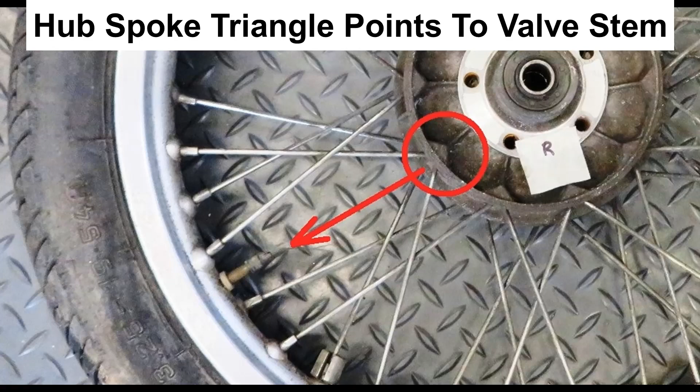Before removing the spokes, document the spoke pattern. The triangle of the hub points to the valve stem hole. The first inner spoke is 3 nipples clockwise from the valve stem, and the second is 4 nipples from it, and so on. The first outer spoke is 4 nipples counterclockwise from the valve stem, and the others are 4 spoke nipples away from each other.

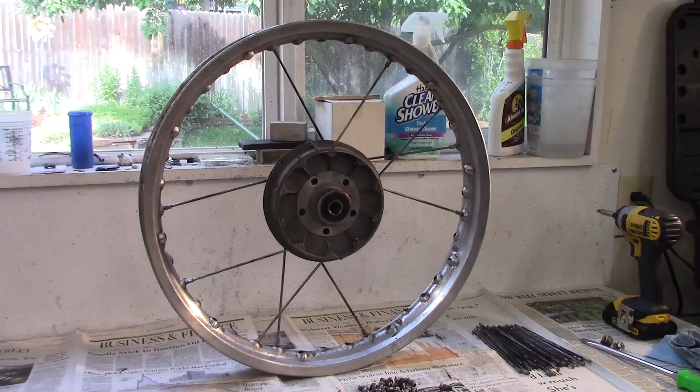So I'm removing the spokes from the wheel because I'm going to have the hub vapor blasted, and then I'm going to try to clean up the rims. I'm going to inspect the spokes to see if they're salvageable, and the nipples. Now I got a spoke wrench from Boxer 2 Valve, and spoke nipples come in various sizes from 5.6 to 6.8 millimeters, so they're fractional sizes.

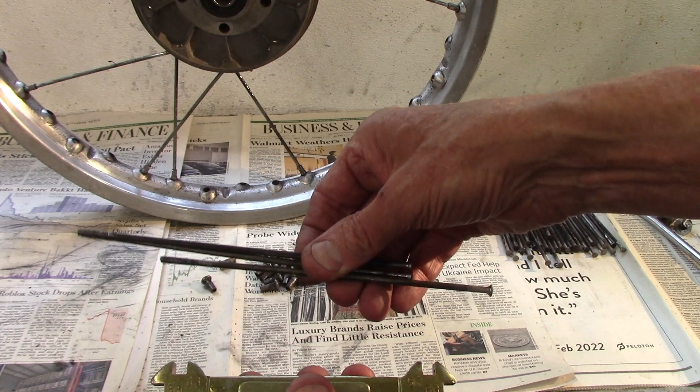And on this bike, these are the nipples. The 5.6 seems to be just about right. And these are the spokes, which in the day and age that they were made were chrome plated, and I'm going to clean them up just to see if they're salvageable. And if not, I'm going to go ahead and replace them with stainless steel spokes and nipples.

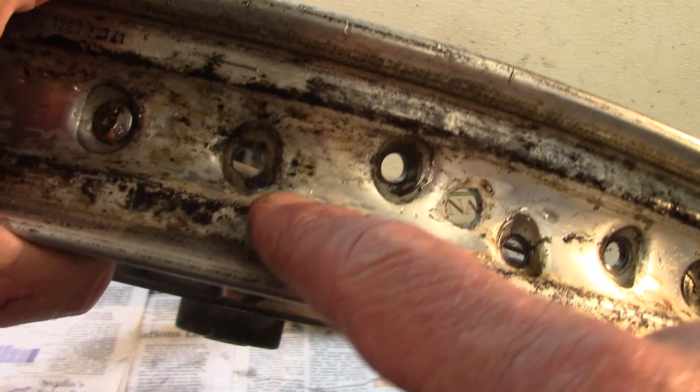I use Kroil, and I put a little on the threads on the spoke, and then I also put a little on the nipple. See if I can find one here to show you. I put a little here on the well around the nipple so it could get into the thread at the top, and I let that sit for about an hour.

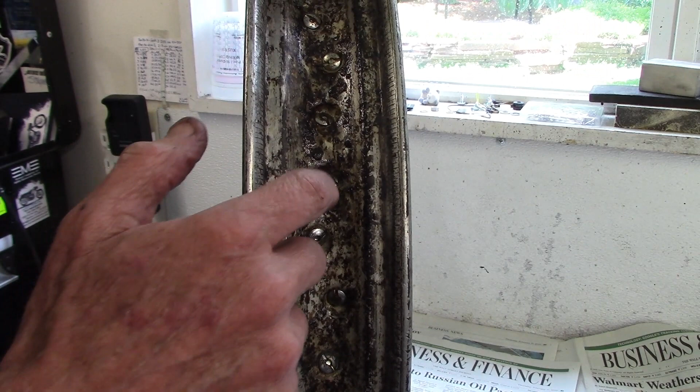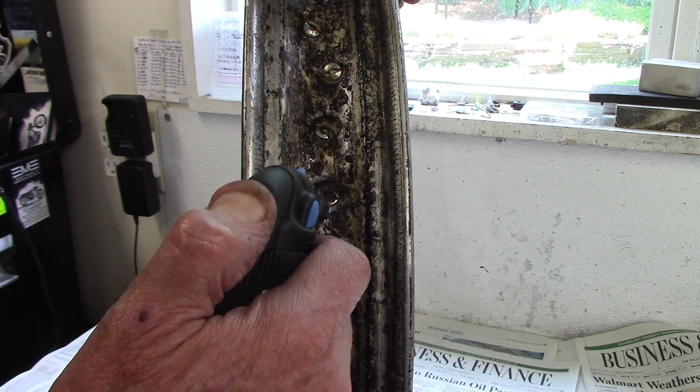Now when I run into a really stuck nipple, I'd use my little propane torch to heat it up and try to loosen up the nipple on the spoke. So I get it warmed up, and then I put a little Kroil on it, which will get pulled in, and then it gets loose enough on the threads that I can take it off with the spoke wrench and not round off the nipple.

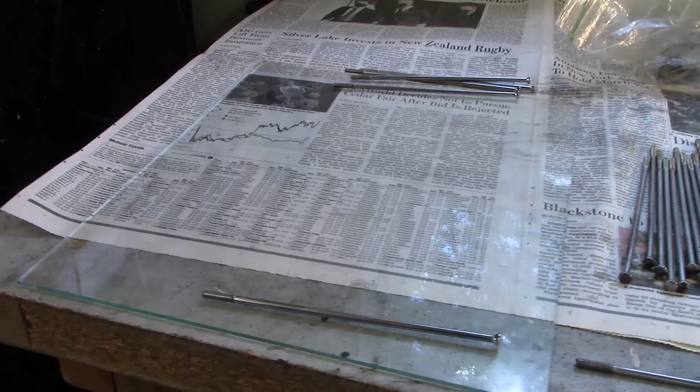Well, I have the hub removed from the rim, and this is the pile of spokes and nipples from the front wheel. When I removed the spokes, some of them were visibly bent, so I pulled them out. And after I cleaned them, I thought I'd use a glass plate and just see if any of the others showed too much of a bend. So what I do is just lay it on the plate, give it a little push, and kind of watch as it goes.

Now that one's okay. This one, when I laid it on the plate and give it a little push, it just doesn't want to roll because it's got a bend in it. And if I get it to roll, you can see and hear that one's kind of bent, so I'm not going to use that one.

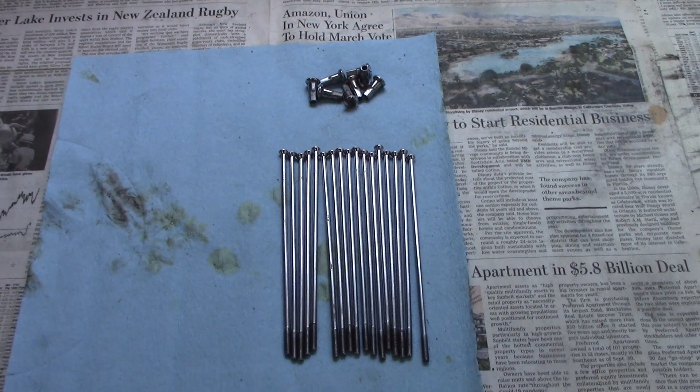So these are the rear wheel spokes and nipples that are still good after I inspected them. Now there's 40 spokes and nipples on the rear wheel. I ended up with about 17 usable spokes and maybe about 7 or 8 usable spoke nipples. So I've changed my mind. I'm going to go ahead and replace the spokes and nipples, and go for stainless steel spokes.

Now this is the rear wheel on the R80ST, and according to Bob Fleischer, aka Snowbum, there's an offset from the edge of the rim to the edge of the brake housing here, or I should say the brake side of the hub, and it's 3 millimeters. So this rim is 3 millimeters away from this edge, and that's done so the rear tire won't rub.

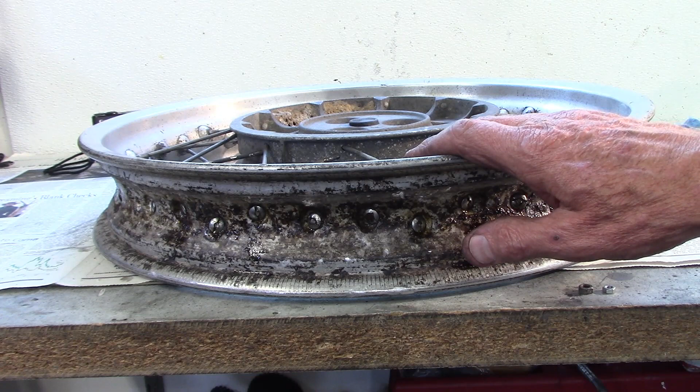So I laid the rear wheel down on my workbench on the brake drum side, and there is a gap. Now I have, I think, an M3 nut, and it measures right at about 3 millimeters, just a little shy. And then I have an M4 nut, and its thickness is closer, it's between 3.5 and 4.

Now if I slide the little M3 nut, it goes under the rim, but the M4 won't. So that confirms that the offset on this rear wheel is very close to the 3 millimeters that Bob mentioned.

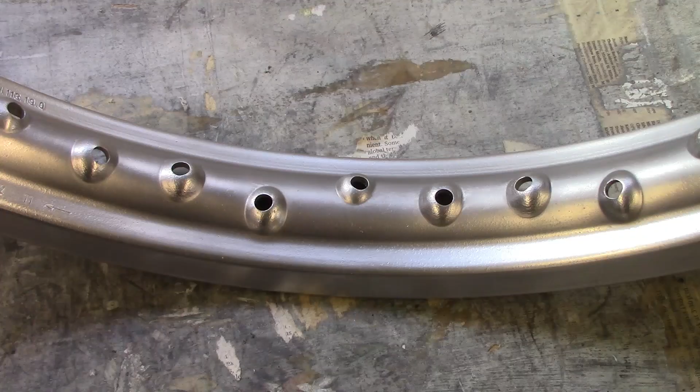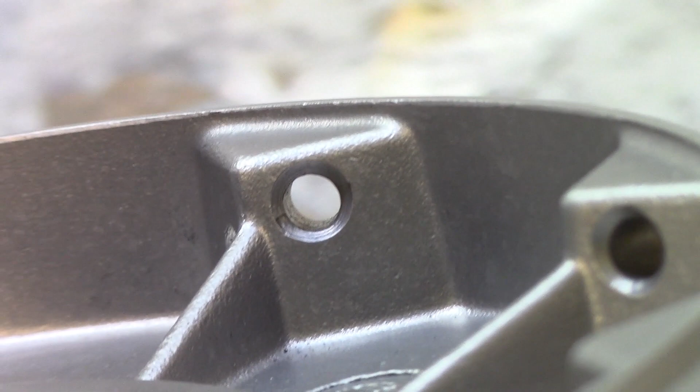In preparation for lacing the wheel, I inspect every one of the spoke holes in the rim to see if there's any cracks. I looked at all of them and I didn't see any. I also inspected the holes here in the hub that the spokes go through. There's some burrs, but no cracks on this side. And on the inside of the hub, I didn't find any cracks either, so that's all good news.

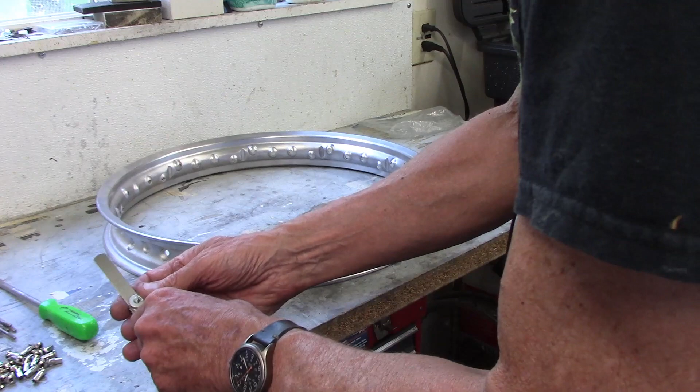Now I want to check that the rim is flat and not badly bent. And I'm using a 0.5 millimeter feeler, and I went all the way around and it would not go under. And I also checked on the inside and it would not go under. So I've got a nice flat rim.

Now the wheel takes 40 spokes, and these are stainless steel. Now the other thing I want to do, because it's a lot easier than using a spoke wrench, is be able to use a screwdriver in the nipple to tighten it up. But because the spoke can extend outward, I also ground a little groove into the blade of my screwdriver, so there's some clearance if the spoke pokes through. And I used a Dremel tool with a milling attachment to make that little slot.

Now on the front rim, you can see the arrow which shows the direction that the wheel is going to rotate. And that arrow is on the right side of the rim. So when I put the rim down on the workbench with the hub, I make sure that the arrow side of the rim is down on the workbench and the left side of the hub is facing me.

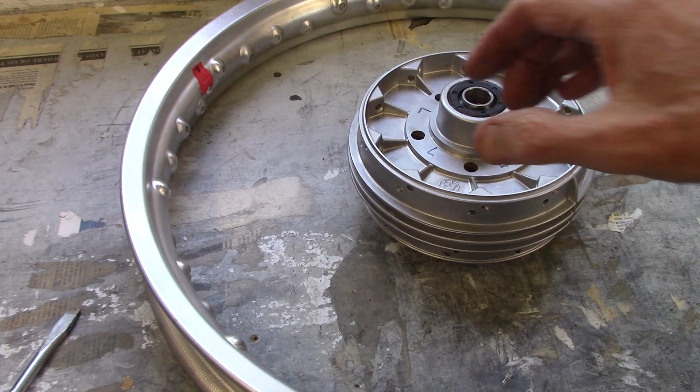So I've laid down the front wheel hub, and this is that little triangle here which points at the valve stem hole. Now the holes here and here and here all the way around I marked with an L. Those are inside spoke nipple holes on the rim, and on the other side are spokes that are going to go to outside nipples on the rim. So I'll be able to use that to get started, and then I'll just repeat the pattern.

Now there's a detail in the design of the spoke head, and near that black dot is a little ridge in the head of the spoke, and that's used to stabilize it in the hub, and I'll show how that's done later.

So I'm ready to start lacing. I have my little triangular piece here on the hub right across from where the valve stem hole is. This is the inside hole, so I'm going to run a spoke in, and it's going to go to the 1, 2, 3rd hole. So I put my spoke nipple in, and I'm just going to tighten it gently, about a roll like that, just to get it in.

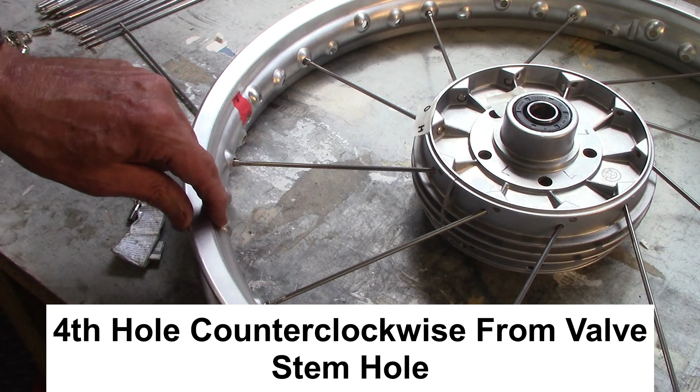Now the first outside spoke is going to go 1, 2, 3, 4 nipple holes from the valve stem hole. So I'll slide that in the hub, and then put the spoke nipple in, and like I did before, just give it about a half turn to catch.

Now the next one will come in this way, like this, and it should be 4 holes from here. 1, 2, 3, 4, and a spoke nipple goes in like that, and I had a little bit of a turn. And so I'll just continue doing that until I get all the outer spokes installed.

Okay, I've got the left side outside spokes installed. So you see they cross over once, goes all the way around, so I now can flip the hub and rim over and work on the same approach to install all the spokes on the right side of the wheel.

So the layout on the right side is the same pattern, and I put my little marker here inside outside. So the spoke goes in here, and it's going to be 1, 2, 3 holes over, and do the next inside hole, and that should be from here 1, 2, 3, 4. Okay, I have all the right side inside spokes installed.

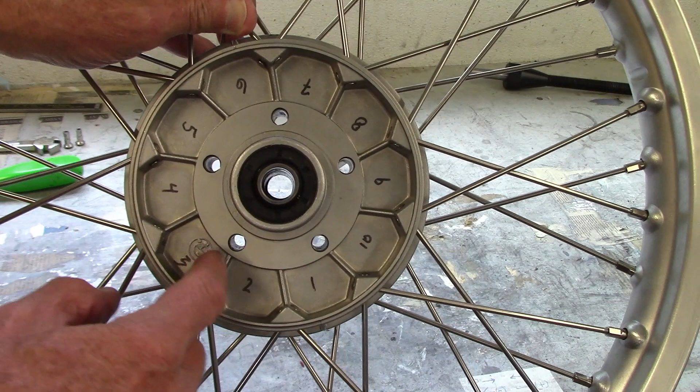So now that I have the spokes installed, I'm ready to start truing the rim. And one thing I did was mark the inside of the hub, each of the sections with a number. There's 10 sections, and that's helping me with measurements when I take them, so I know where they came from. And the other thing that I've done to the rim, which I showed earlier, is there's a little red tape by the valve stem hole, and I always start adjusting from that area.

So I want to talk about some of the details of the layout of the spokes. You'll notice that there are 4 spokes in a group, and then another 4 spokes in a group. Now the 2 outside spokes go to the outside of the rim, and the 2 inner spokes go toward the center of the rim. So that means that if you want to get the radial distance adjusted, which is centering the rim on the hub in this direction, if you tighten or loosen the 2 inner spokes, that's going to have more effect on the radial movement.

And if you were trying to get lateral truing, which is in this case up and down, because I've got the wheel lying down on the workbench, then the 2 outer spokes are going to have more influence on that. Now that said, all 4 spokes do affect both radial and lateral, but again, the major influences, as I mentioned, are the 2 inners give you radial adjustment much quicker, and the 2 outers give you lateral much quicker.

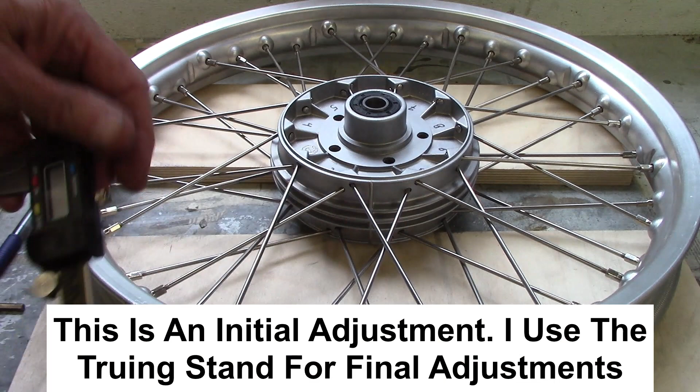Now, before I put the wheel in the truing stand, I'm going to try to get the radial adjustment made here on the workbench. So I'm going to start getting the rim centered on the hub, and I'm going to use an 8-inch vernier caliper and make measurements between the inside of the hub and the outside of the rim in each of the 10 sections until I get it pretty close. Then I record my measurements on this little diagram. These are the little triangular blocks that the spokes go into in the hub, and these are the numbered sections. So I'll record my measurements all the way around.

Now, before I start tightening any spokes, everything's loose now, I just kind of want to get the hub and the rim close to center, and then I can start tightening spokes. So I'm going to use my vernier caliper and zero it. Section 1 is directly across from 6, and 9 is directly across from 4. So just going to kind of see where I am. Now what I do is try to get it level up and down, and then I wiggle it just a little bit until it's tight. I find the tight spot.

And it's about 179.9 for section 1. And for section 6, it's about 179.3. So they're pretty close. And I'll do the same with these two. And if I find there's more than about 2 or 3 tenths of a millimeter, I'll push the hub a little until I get them pretty close, and then I'll go around and start finger tightening spokes.

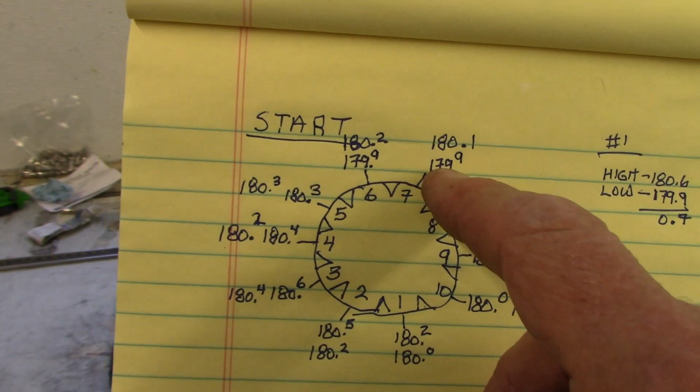So what I'm going to do is loosen the center spokes on this side and tighten the center spokes on this side just by finger. And it should help move this over a little bit and shorten it up on this side and lengthen it up on that side. So after loosening these and tightening these by my fingers, I made some adjustments, as you can see by the numbers.

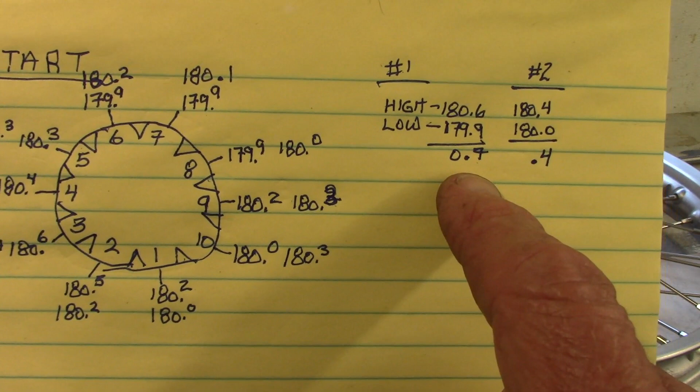Now over here, I summarized the highest and lowest and the difference. So I started with about 0.7 millimeters of radial play, which is way too big. The maximum is 0.5. And then here, after I did the little adjustment with just changes in finger tightening, I got down to about 0.4. And I may make one more set of adjustments.

So these are the numbers after going around one more time. And I did need to use my screwdriver to tighten up a little bit. And what we've got now is down to about 0.3 millimeters in the radial direction for variability. So that's pretty good before I put it into the truing stand.

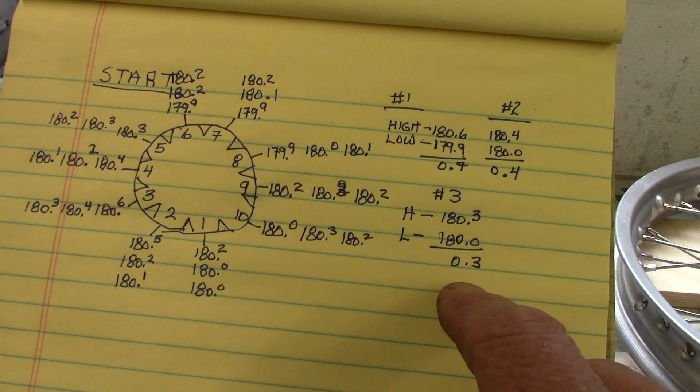One thing that's interesting is this section 3 is always fairly big relative to the ones on either side. And it's possible, in fact, that there's a bit of a deformation in the rim right there. Sometimes people have hit curbs or bounced against something and deformed the rim. So that one may be a little bit of an indicator of some minor bending. Because if you don't have that, then it's down around 0.2-ish, which is a really good alignment.

Now before I put it in the truing stand, I'm going to finger tighten the outside spokes all the way around, and I'll probably just check to be sure I didn't distort anything in the radial dimension when I did that. But that should be enough to hold the rim in the lateral dimension.

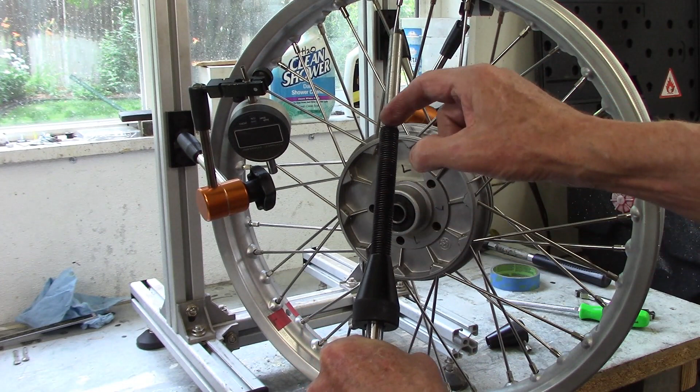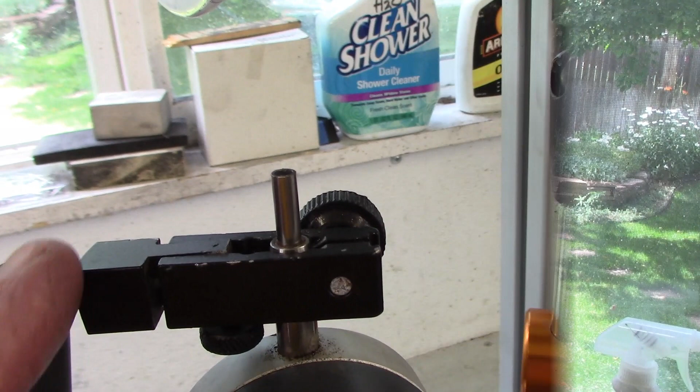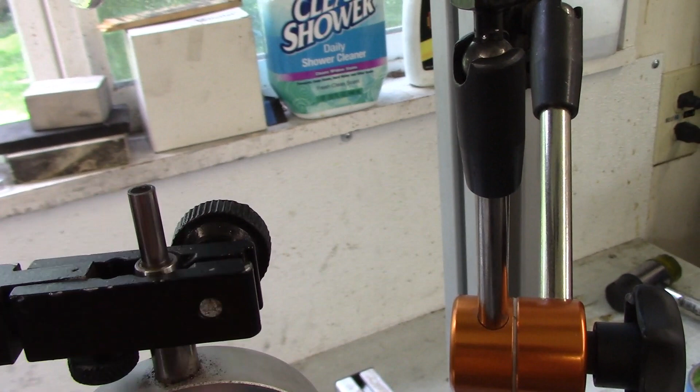Now the cones on the spindle have a set screw which I tighten, and I put the spindle in the top of the stand, and it's also got a set screw which I tighten, because you don't want the wheel moving in any dimension while you're trying to get everything trued. Now the stem of the dial gauge had a small feeler in it with a little ball bearing, but it's too small a contact area, so I took it out so I get a flat area here to engage the rim with.

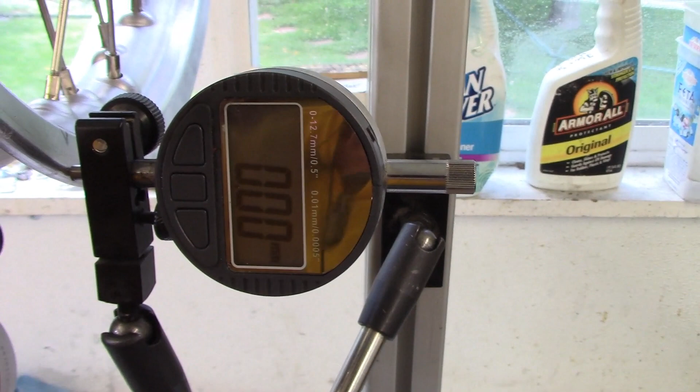Now this dial indicator I've set on the edge of the rim, so it's going to measure radial deflection, and then this one I've set on the edge of the rim, so it's going to measure lateral deflection. So then I zero both of the dial indicators right at the valve stem hole.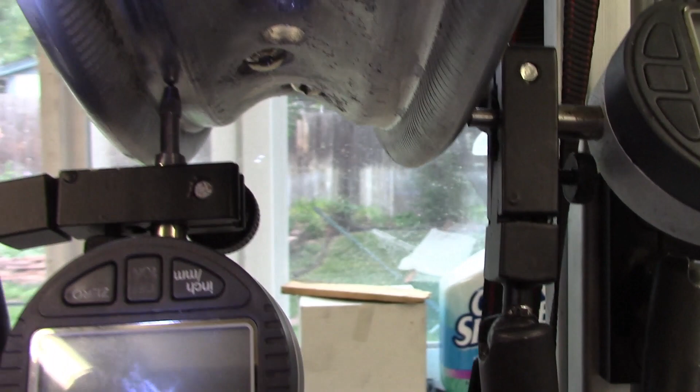So I originally started measuring the radial distance changes on the outside of the rim, but it was pretty banged up. So what I finally did is I put the little ball bearing tip back in on that particular micrometer, and there's a reasonably flat section on the rim on the inside. Now there's some pits in there, but I found this was more reliable on this wheel for getting the radial measurement.

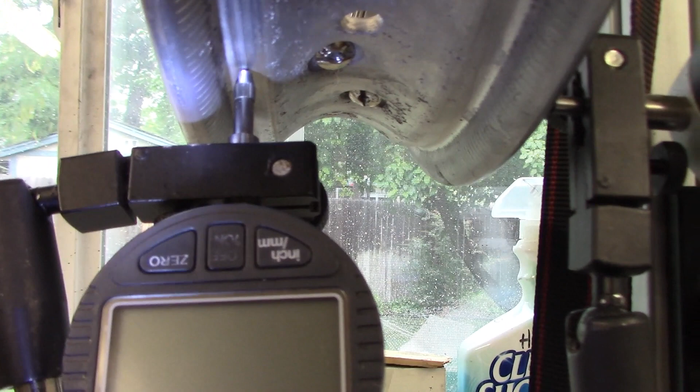So what I'm going to do is start adjusting the outside spokes and attempt to get the lateral changes to no more than 0.2 millimeters. To help me keep straight what I'm doing, I made a little piece of tape here, and it shows that when I get a negative reading on the dial indicator, it means the wheel has moved too far to the left, and so what I need to do is adjust it to the right.

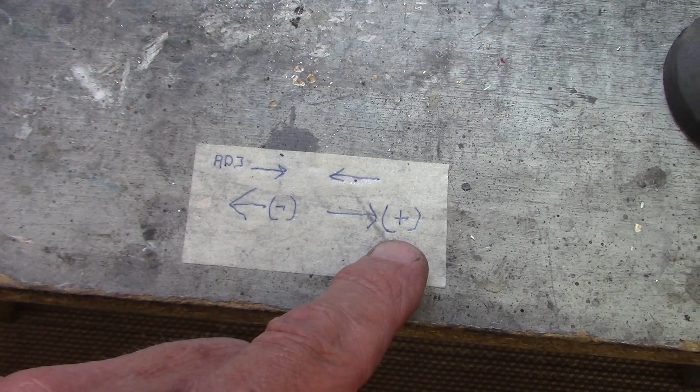And similarly, if I get a plus movement on the dial indicator, that means the wheel's moved more to the right, so I need to adjust it to the left. Having that to look at makes it a lot simpler to keep doing things correctly.

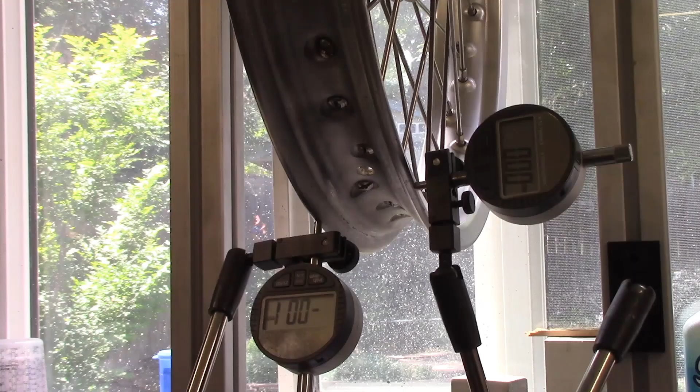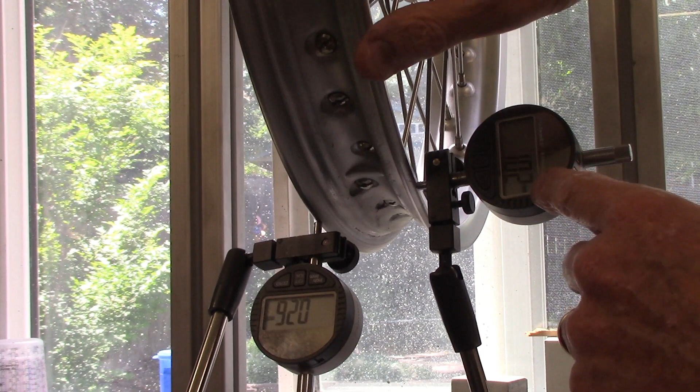So I'm just going to spin the wheel and take a look at what's going on. This is the lateral, and this is the radial, and I'm going to zero them and just spin. And here it's going down to minus 0.05. Now it's going to plus, and it's up to like 0.1 millimeter, 0.15. And then it starts to go back down again.

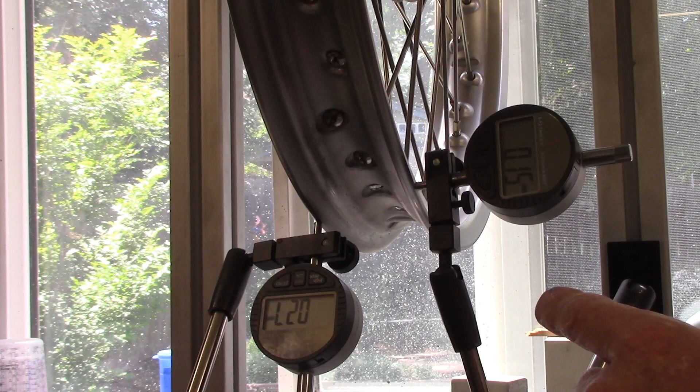So I'm going to work on the lateral adjustment next. The little V mark just tells me I'm at the valve stem, and as I rotated, I put a negative here and a little mark. What I'm looking for is to get the lateral movement no more than plus or minus 0.1 millimeters, because the total deviation can be no greater than 0.2.

And this indicates that I'm beginning to get past minus 10. And I keep rolling, and then right here, it switched over to about plus 10. And now I keep going. Now that's a pretty long section of plus 10, and it ends right about here. Now, if it's plus, that means that the rim is pushed over to the right, and if it's minus, it means it's pushed over to the left.

So what I'm going to start with is adjusting the big long run of plus and try to get rid of it. Now, in each group of 4 spokes, the outside spokes cause the biggest change in lateral movement. And this one, which is over on the left side, if I tighten it, it's going to pull the rim that way. So I'll start tightening these in each group of 4, and as necessary loosen these and try to pull this whole section of rim over to the left.

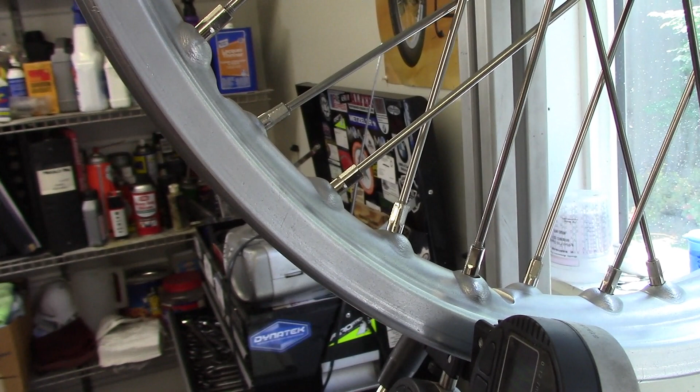And I'll do that in small increments, because even as I work in one section of 4 spokes and make a change, it will cause some deviation in the adjacent section as well. So you don't want to try to make the correction all in one change. You want to do it incrementally in small amounts of rotation of the spoke nipple, and then see what the difference overall is. And that way you can get closer to what you want to achieve and not overshoot.

So I'm going to use my spoke wrench to tighten and loosen. And one of the things that you should keep in mind is that when you turn to the right, you get tight, and when you turn to the left, you get loose. So if you take your right hand and you curve your index finger, that means in this rotation is tight. And if you use your left hand and curve this way, that's loose. So right, tight, left, loose. Remind yourself of that, because sometimes you get yourself confused.

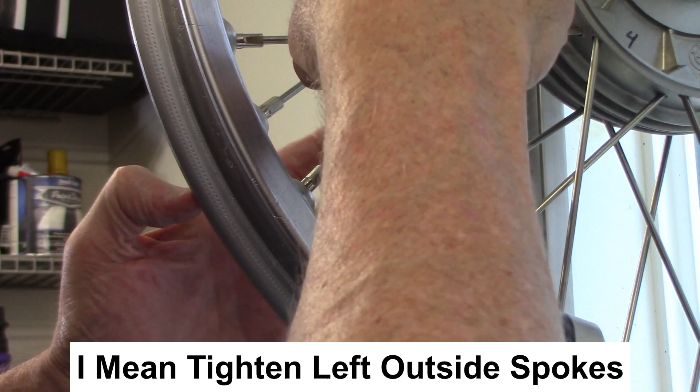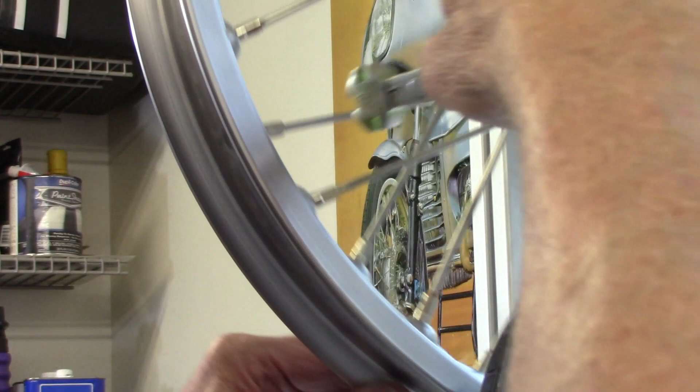So I'm going to start out by just tightening the spokes about a half turn, and I need to tighten the left outside. So right is tight, so I just go around like that and take every one of them about the same amount, so I'm not getting too tight all of a sudden. And I just keep going around, and then I'll take a look at my dial indicator and see how much difference I've made. So the dial indicator is back to where it was before, and you can see I'm actually minus a 100th of a millimeter.

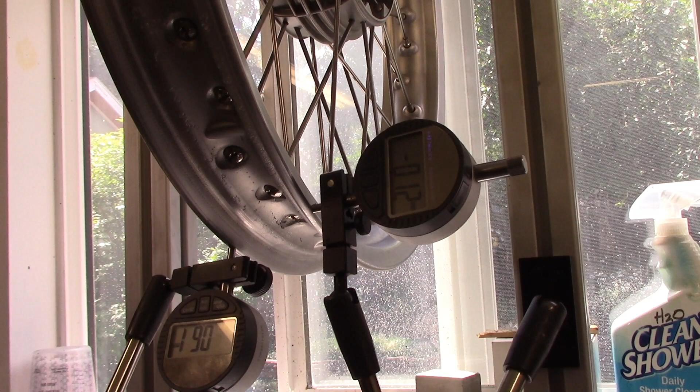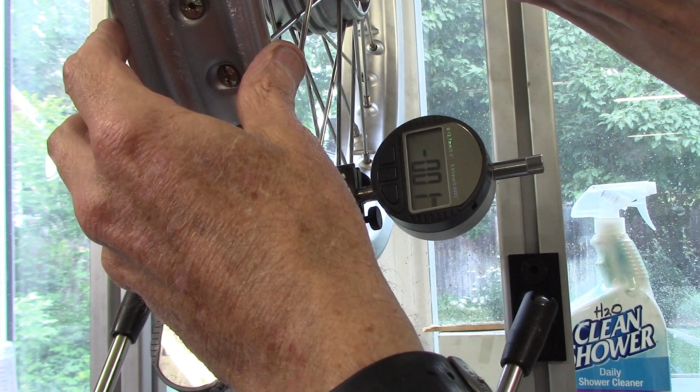So I made some adjustment, and I'm just going to spin it and see where I am. Still a little big in some places, but interestingly it goes negative much sooner than it did before. So actually I've overcorrected a little bit already, which I'll go back and fix. Now as I work my way along the rim, you can see here I'm going up to minus 14 and then back down again. So I need to adjust this section a little bit. So I'm going to start by loosening the spoke on the left a little bit. And you can see that the deviations come down.

Now I'll back up again here. So I'm going to loosen this one just a little bit. And I'm going to tighten the right side, which is actually quite loose. So you can see it went from minus to plus, just because that spoke was loose. Now we're still a little bit big here, so I'm going to back off that one a bit and tighten the right one a bit. And that's too much. So I'll back that off a little, down around 0.06.

And we go back to a little bit too much negative in here. So I'm going to tighten one of the inner spokes just a little bit. And that gets rid of it, and loosen one of the inner spokes just a little bit. So I did most of it with the outer.

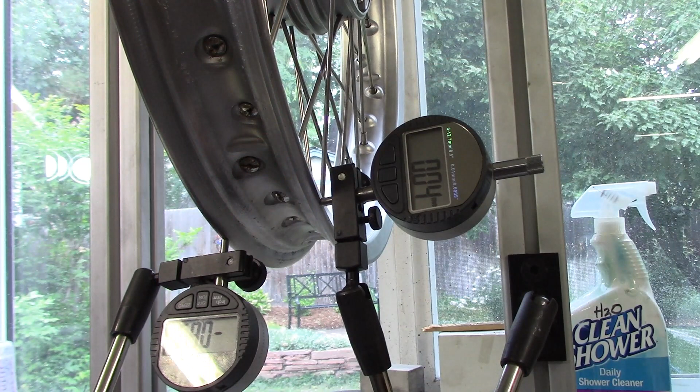And again, you see here, it's a little bit too much. So I can loosen this guy a little. And he comes down to about 11. And I'm going to tighten the inner one a little bit, because I need to reduce how much it is on plus. And that smoothed things out pretty nice.

So just to review again, if it was too negative, loosen this, tighten this. These are the outsides, because that gets you the biggest adjustment. And then if you need a little addition, use the insides. This one's the left inside, this one's the right. So if I loosen this left inside, the wheel's going to come over to the right. And if I tighten the right outside, the wheel is going to come over to the right.

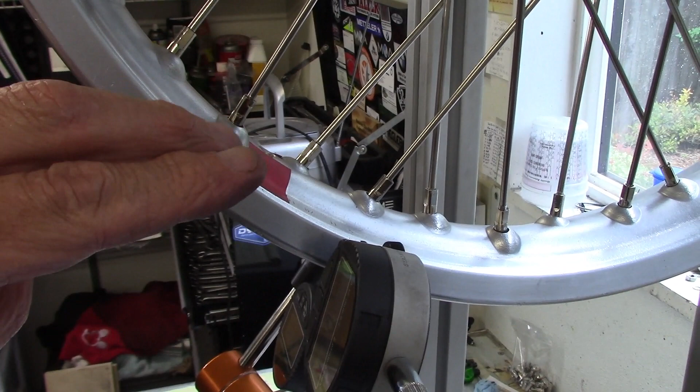So I make most of the adjustment with the outsides, and if I need a little additional, I'll try to tighten and loosen on the insides appropriately to get things smoothed out. And as I do that, as you noticed, it'll ripple a little bit to the adjacent section of 4. So you want to roll your wheel back across the section you worked on, the one before it, and the one after it. And if there was a little bit of variation, too much change, play with these guys to smooth it out a little bit.

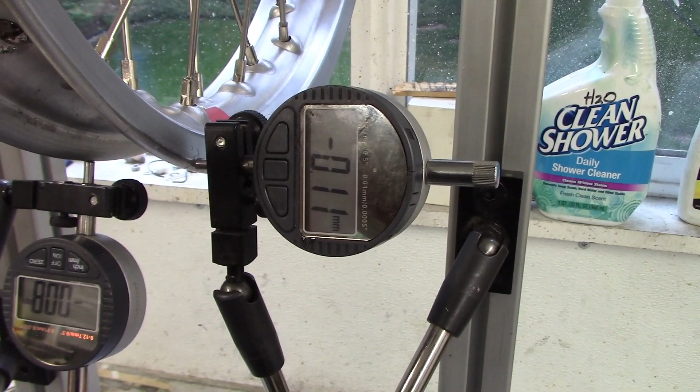And just kind of work through each of those sections of 4. So what I find I'm doing is I tend to be working on smoothing things out across 3 sections of 4 spokes. And that seems to work pretty well for getting the fine adjustments done. So starting at the valve stem but rolling the other way, you'll notice that the negative is still okay. It doesn't get any bigger than 0.1 millimeter.

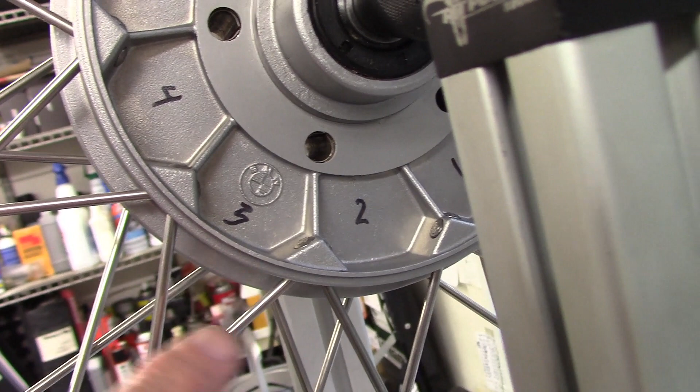And then right in here, I get a little further, it comes back down, and then right in here, it just takes off. It goes up to minus 0.21 and then right back down again. Now I marked that section, and it's very short little piece, about like that. And when I look up here, it's right in the area of section 3, which is that section that I noticed when I was trying to set the radial deviation and get it true. There was an anomaly right in that area. It jumped up radially, and I'm seeing it jump up laterally.

So I suspect that this is where there's been a bit of a bend to the rim from having hit something. So one of the things that I do is I usually just ignore this section, because there really isn't anything I can do to get rid of the larger deviation inside it, and just work on smoothing out everything on either side of that. So I've adjusted the lateral movement, and things are looking pretty good. It bumps up to 10 and 11 in some places, but generally it's within tolerance.

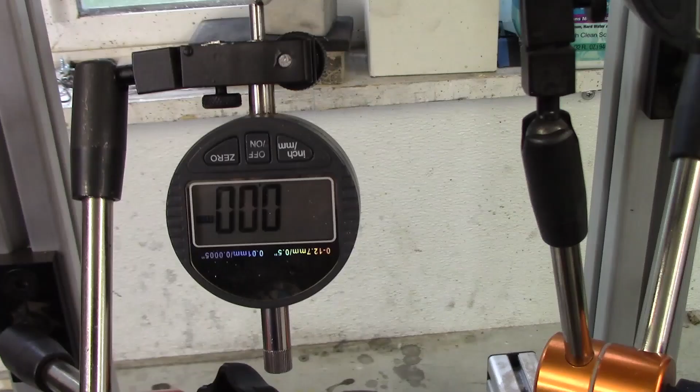So this is the radial indicator, and you can see the differences, minuses, and some pluses. It transitions from pluses to minus. So I went back and noted where the minus transitions to plus on the radial measurements and marked it on the rim. And then here it goes from plus back to minus, and then it transitions again back to plus. So after looking at the rim, this is a negative, and across from it is a negative, and this is a positive, and across from it is a positive.

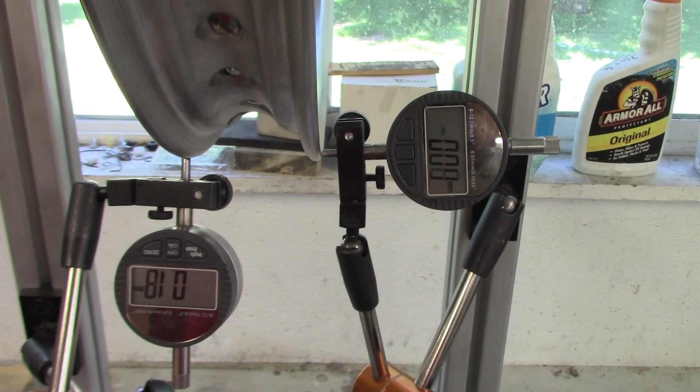So what's happened is this section and this section have been pulled in, and I think that's caused these two sections to bulge out. So the way to proceed is to loosen these, and then tighten these and tighten these to get rid of that bulge. So after those adjustments, here's where I am now. And the radial is bouncing between minus 0.25 and plus 0.25, which is pretty good.

And the lateral has gone out more than I'd like in certain sections. So I'm going to have to come in and make some finer adjustments to get the lateral back where it needs to be. But I'm making progress. Patience is a virtue.

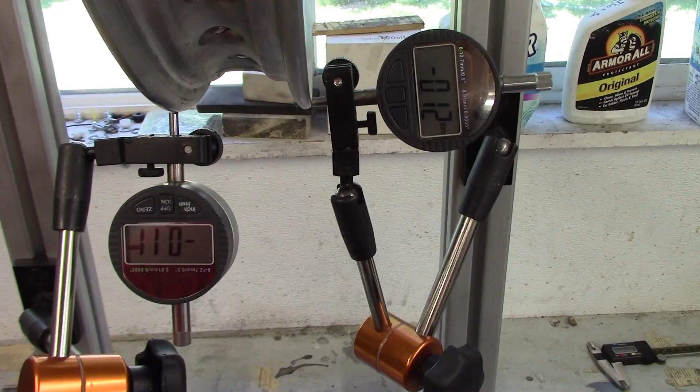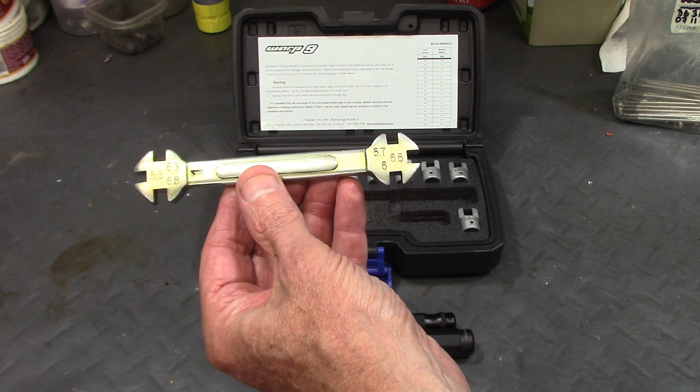When I started working on the spokes, I originally used a spoke wrench I got from Boxer 2 Valve. And as I did some more reading, I learned that there's also such a thing as a spoke torque wrench. And the difficulty with using this is you really have to have the sense of feel for how tight the spokes should be. And I'm a novice, I don't know what that should feel like.

So I went ahead and picked up a spoke torque wrench kit from Warp 9 Racing. And it comes with a set of sockets for different size spokes. And this is the 5.6 millimeter socket that fits the nipples on the R80ST. Now it comes with a handle that you can use to just tighten spokes, and it comes with a torque wrench that you can set in inch pounds or in Newton meters, and the graduations on it are much easier to read in Newton meters. The box also includes a conversion table that you can use to go between inch pounds to Newton meters.

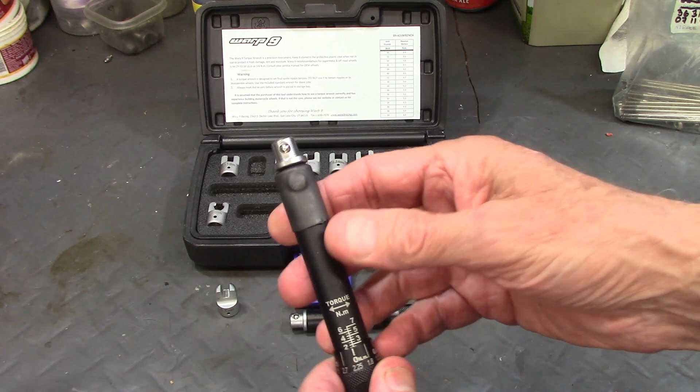Now, I contacted Buchanan Spoke and Wheel, and they recommended that the spoke torque should be between 40 and 45 inch pounds. Now, there's a little detail about the torque wrench. You'll see there's a little ball here and a little hole here on the socket. They need to go together like that, because if they are like that, then you can hear the wrench clicking as you turn to the side.

But if you make a mistake and you put this on other than in that dimension, over here somewhere, you're not going to get any torque because the clicker won't engage. So it's very, very critical when you put the socket on that you line up the little hole in the socket with the little ball bearing in the head, so that you're going to be getting the torque wrench action when you tighten up the nipples.

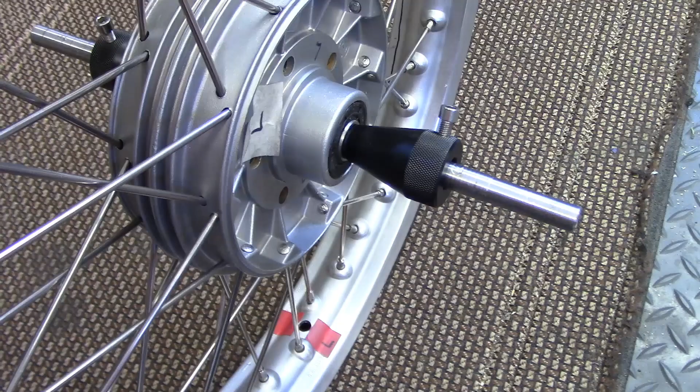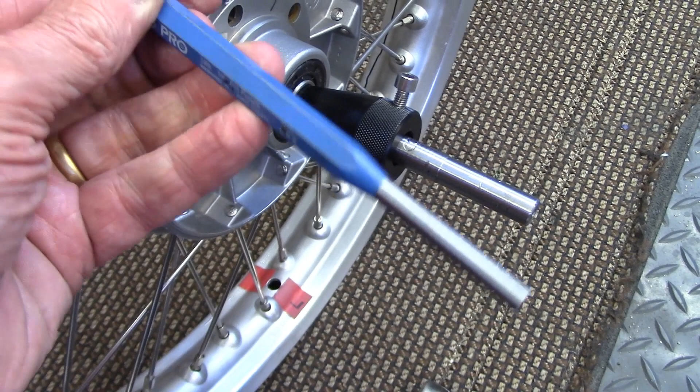Now that I've gotten the spokes tightened up a bit and the wheel trued more, I need to set each of the spoke heads in the hub using a punch and a hammer. There's a little ridge on the side of each spoke head, and if you tap hard on the head, it'll seat it into the hole, and that will keep the spokes from loosening up. So that's what I'm going to do now.

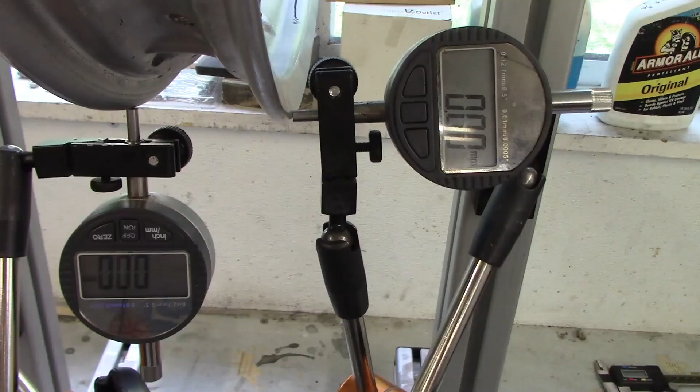So here's where I am at this point. Things are looking pretty good. Once the rim is trued, the next thing I want to do is inspect the spoke nipples and look at where the spoke is. It should be recessed, but if it's proud of the head of the spoke nipple, that needs to be ground off or it's going to puncture the inner tube.

So you'd use, in my mind, a good Dremel tool with a burr on the end. You can grind it out and get it back to where it's flush or a little recessed. But when I spun the wheel and I looked at it, none of my spokes were proud. So that's one less thing I've got to do.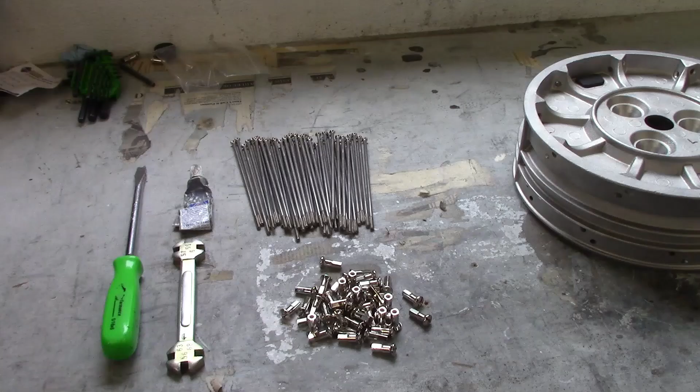Now, as is the case in the front hub, the rear hub uses 40 spokes and nipples. However, the rear spokes are a little shorter, and all 40 of them are the same length. So I have the left side of the rear wheel laced up, and on the rim, here's the arrow, and since it's on the left, it should be pointing counterclockwise because it's in the direction that the wheel rotates when going forward. And the right side's all laced up.

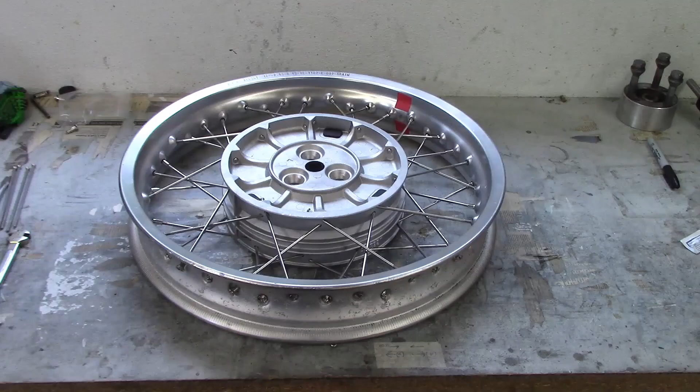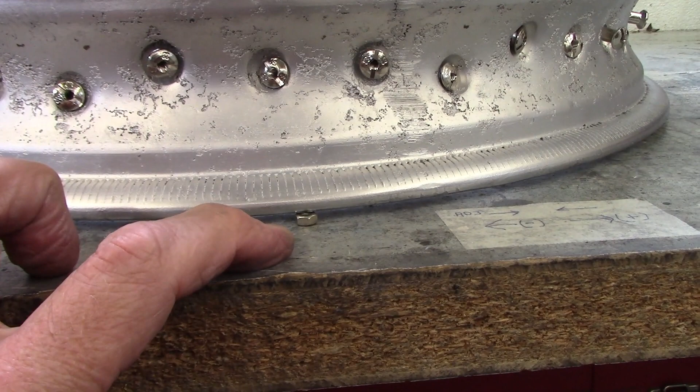So I've laid the wheel down on my workbench, so the brake drum side is on the workbench and the left side's pointing up. And then the rim is going to have a 3mm offset from the hub. So what I'm using are M3 nuts, which turn out to be 3mm thick, and laid them under the rim. And then when I use my 8-inch vernier caliper to center the hub, like I did with the front wheel, I'll end up with that offset before I put it in the truing stand.

Since I'm going to rotate the hub as I tighten up the spokes, I used some tape and taped 3 of the M3 nuts right on the edge of the rim, so they'll always be in the right place as I move the rim around on the workbench. So I put a spare battery on top of the hub just to make sure it stays flat on the workbench. And as I tighten some of the spokes, there's a tendency, of course, to pull the hub up. So putting that on top should keep it flat while I get the radial adjustments done. So here's the radial measurements I made on the rear wheel.

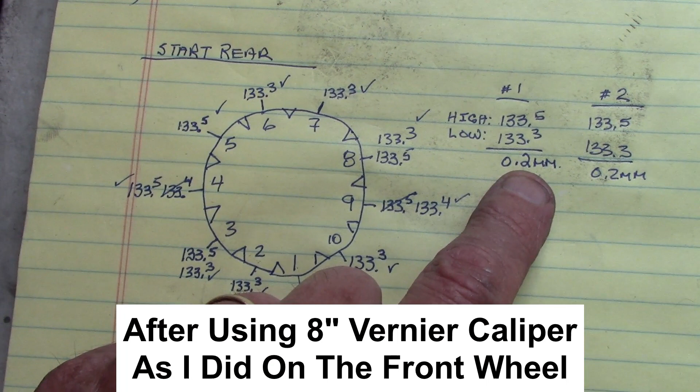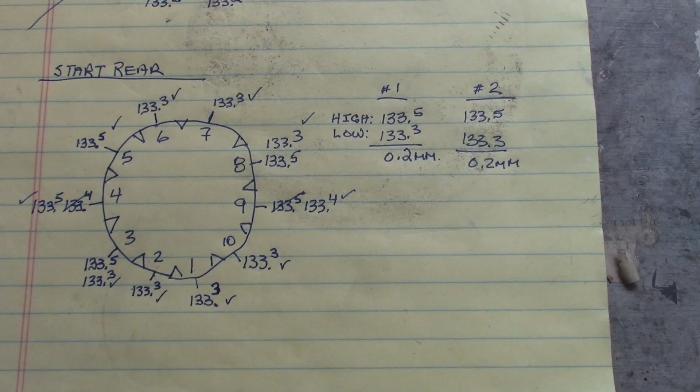The first set gave me only a 0.2mm difference, and the maximum could be 0.5, so that's a pretty good number. And then I went around and tightened all the spokes so they were about equally snug, and measured again, and all the check marks show I had the same measurements, and in a couple of places it moved by a small amount, but the total difference still didn't grow, still 0.2mm.

So everything's good. The other thing I did was visually look under the rim and made sure that the hub is flat on the workbench now that all the spokes are finger tight or a little bit tighter. I haven't moved the hub up, so that's good. I'm ready to go ahead and mount this in the truing stand and finish up.

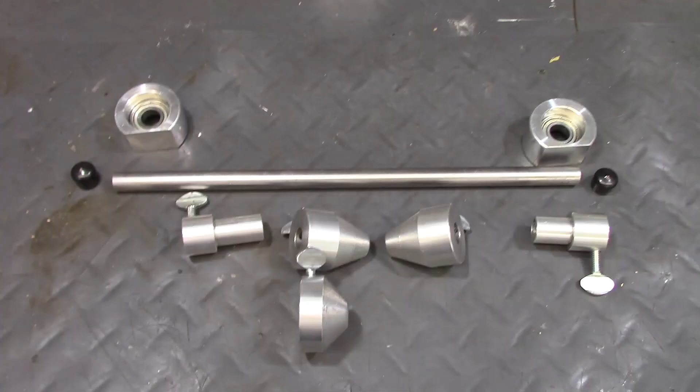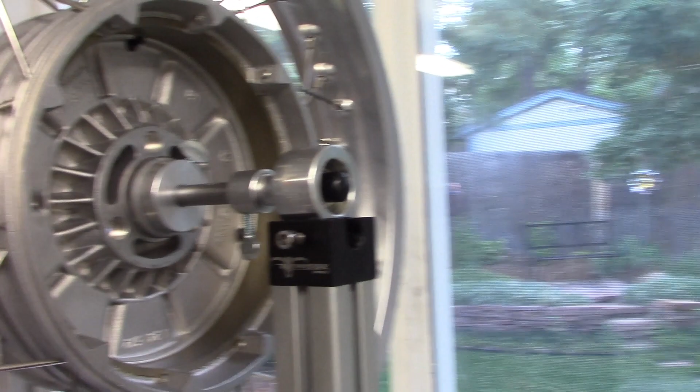This is the Marc Parnes wheel balancing kit that I have. There's 2 deep cones and a shallow cone, and 2 end connectors, and 2 bearings and end caps. Now the R80ST rear wheel does not have wheel bearings, so I can't use the truing stand spindle to mount it. When I mentioned that to Matt Isles of Isles Motorsports, who I borrowed the truing stand from, he suggested trying the Marc Parnes wheel balancing axle and attachments, and it worked.

Now it comes with a bearing, and it comes with a short cone, and also with a locking sleeve. So I mounted the short cone on the face of the hub, which is inside where the brake shoes go, put the locking sleeve on and tighten the lock screw, and then put the plastic cap on the end, and that keeps the bearing from sliding on the shaft. Now on the left side, the long tapered cone fits, and again the locking sleeve and the plastic cap.

And after I tightened everything up, I checked, and the wheel is not moving laterally, nor is it moving radially. So it's pretty solid, and that looks like a good way to work with a rear wheel that doesn't have any wheel bearings with this truing stand. So to stabilize the bearing on the top of the post, I used a strap and strapped it down on both bearings, and that kept it a little more rigid.

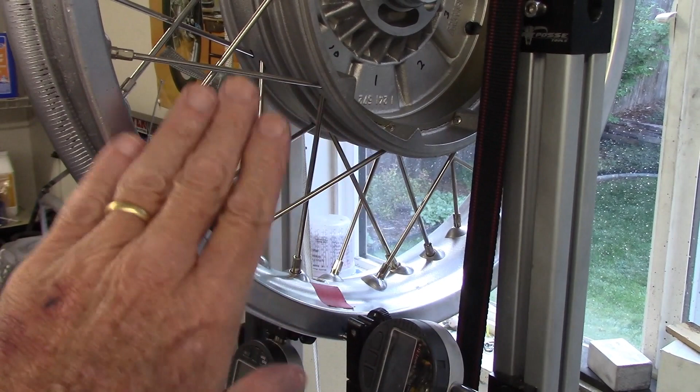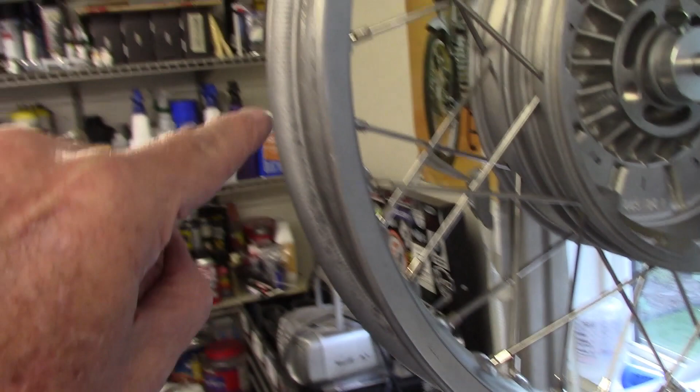However, after I'd make any adjustments to the spoke, it was pretty common for the wheel to shift a little. So what I'd always do is roll the wheel back here to the valve stem and re-zero the 2 dial gauges, and then roll it back out to wherever I made the adjustment, and see how much difference I made. It's a little time consuming, but it works okay.

Now, as you recall, I set the rear rim offset to about 3mm, but as I tighten up the spokes, I want to verify that it's not shifting. So I take a little piece of all thread and lay it across the hub like that, and hold it, and then I use my caliper and I measure the distance from the farthest out section of the hub to the edge of the all thread,

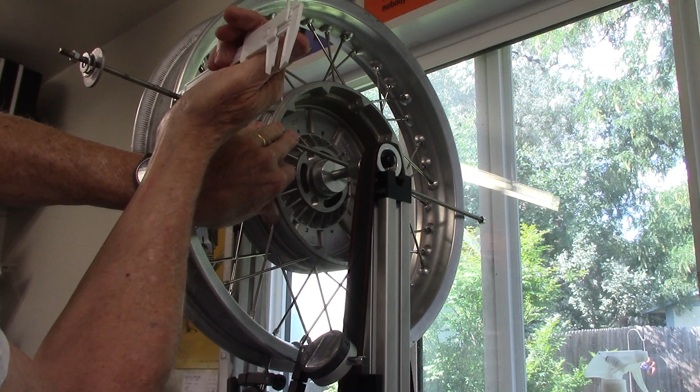and I already measured the thickness of the all thread, and I know it's about 7 millimeters. So I need to be around 10 to 11 millimeters, and that's about where I am. So that means the rim is staying recessed. You want to check that as you go along, because I didn't do that once, and I managed to pull the rim flush with the hub. So I had to loosen up all the spokes and start tightening it up again.

Now if you find that the rim is too far this way and you need to pull it back, you want to loosen the spokes here that are on the right side and tighten the ones back here which are on the left side, which will tend to pull the rim in this direction. So you can correct the mistake without taking the wheel apart.

And what I normally do is just go around and loosen these right side spokes just a little bit, and then tighten up the left side spokes about the same amount, and then remeasure. And I keep doing that until I get the offset on the rim in the range I need it to be.